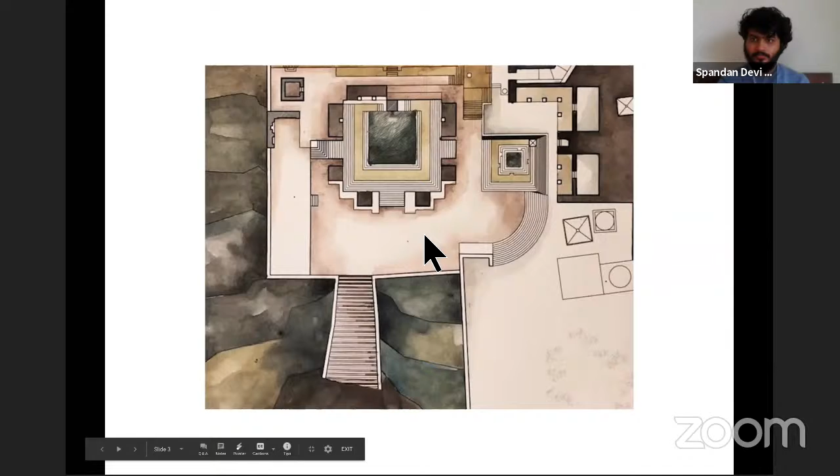Good evening. In a socially distanced world, Design United is an optimistic digital platform for collaborative design and connection.

Design United was created in March 2020 during a period of intense lockdown and quarantine measures within the region. The aim behind Design United was to create an optimistic space for regional dialogue, connections, collaborations, and opportunities for young regional designers and design practices, a much needed network of support and peer mentorship during these uncertain times.

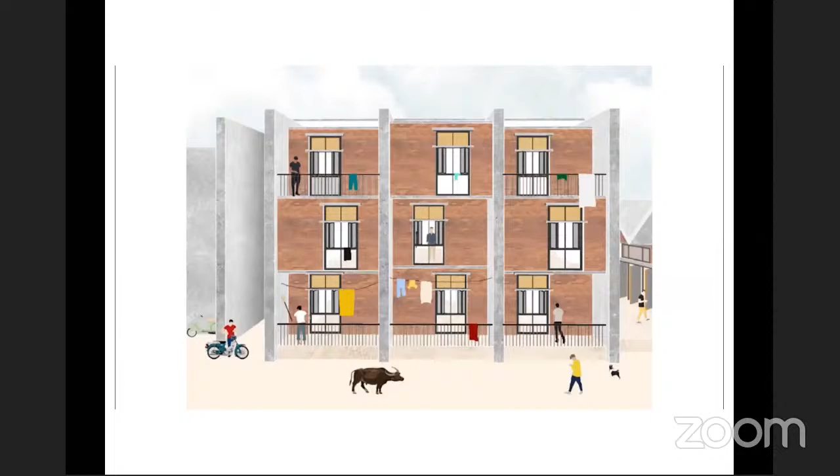Talented young designers and design studios working on design innovation with an approach that is relevant to our South Asian region have been invited to be a part of the platform. We also encourage design students from the region to share their work, be involved in the dialogue, and to be an active part of Design United.

Design United, most of all, believes in creating a community of designers and design knowledge that is largely contextual, with focus on contributing to the environment and our community. Design United believes greatly in a spirit of collaboration and idea exchange.

Welcome to Design United's 30th Design Conversation and our 7th mentorship module. Mentorship and constructive criticism is essential to nourishing designers.

Today, we will be in conversation with two renowned architects, Yanto Effendi from MODERNSPACE Indonesia and architect Ajit Andagere from AA India. I'm Varna Shashidhar, founder principal of a regional landscape practice, VSLA, based in Bengaluru.

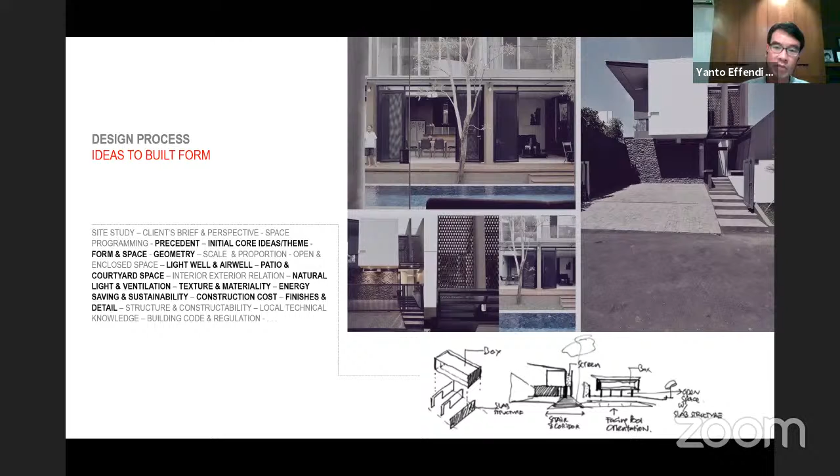Initial core ideas. On the first trial, the first time we get the appointment, we try to study the site, study what's the core problem of the site that we can resolve, and resolve it into a design language.

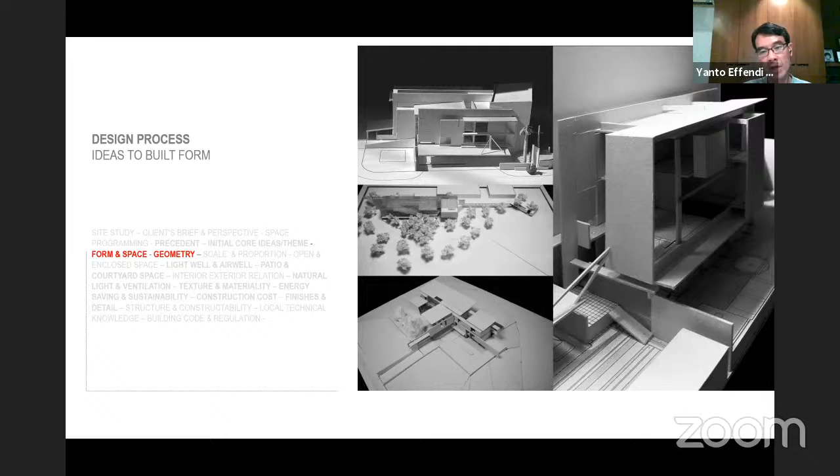We study the form and geometry. This is the process in our office, that sometimes we do models just to study the forms. And then we do 3D studies also, from wireframe studies into basic renderings, just to see how the materials, colors, and schemes work out together.

Each of our designs, basically, I would love to have natural light and natural ventilation coming into all the sites. So every site, every specific site that we receive, either small or big, we always try to analyze the potential of the sun, natural sunlight, natural air to come into our buildings.

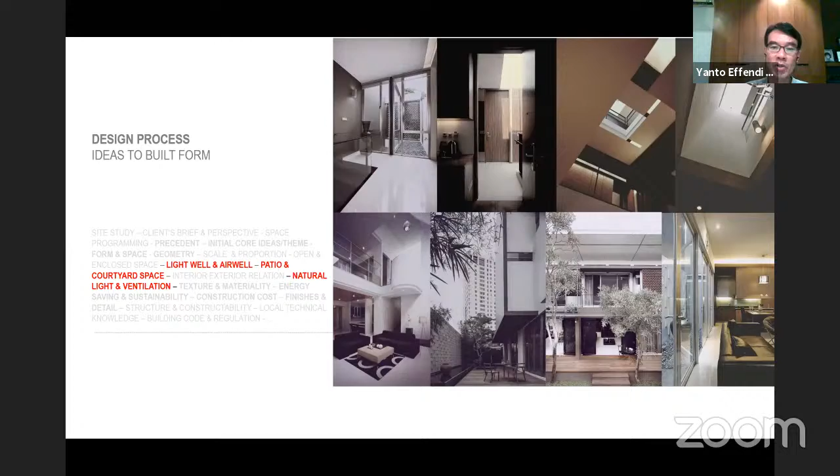When we try to do this, we know that the effect is heat. So during this period of time, we extensively try to study how, inside our space, to make it quite thermally comfortable in order to get the most optimum light into the space, but we can also reduce the heat to prevent it, to make the thermal comfort inside our space.

The materiality we choose depends on the mood, depends on the program, depends on the specific mood that we want to create in the space. The material and the details itself we create to solve each of the finishes that we have to collect into the space itself.

After the form and everything, the space is created. We also try to solve every detail of the particular corner, particular joints, so that we have well thought out, precise details to solve every corner of the materials that we use, so that everything works out well together by joining all the materials to create the space.

This is some material that we're using. We're using textures, smooth textures, rough textures, and then some of the character of the material itself to create the specific functions.

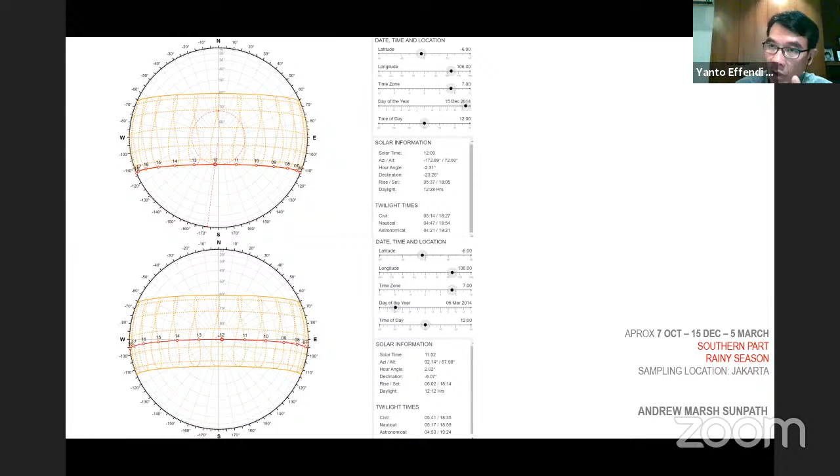That's all the introduction of our brief projects. I wanted to present 3 projects which I felt were milestones for us, to study specific use of material and specific ways of solving problems. Like in this house particularly.

This project happened around 2012. We have this kind of project that has one area facing west sun. During that west sun period, from 12 o'clock until 4 o'clock, there will be heat transferring into the space. So this particular house is actually the one where we first tried to study how we can protect the glass that we want to open for view, so that the glass doesn't get heat from the sun. When it's not heated, hopefully the space inside will be cooler due to the protective materials.

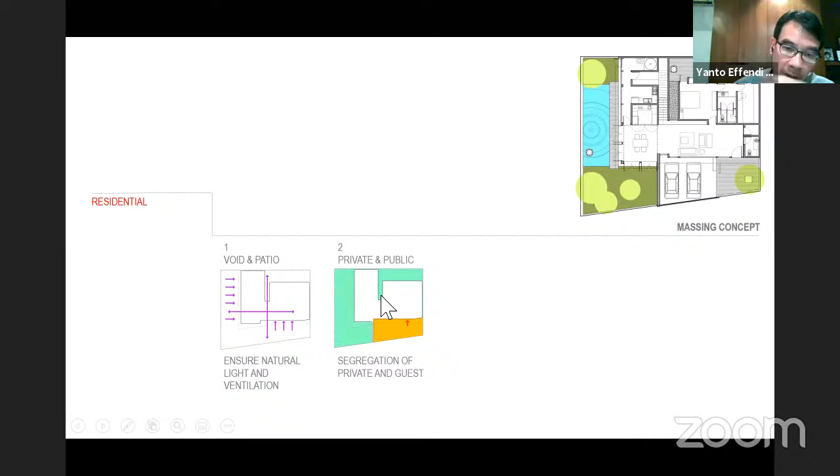We've done some analysis for this house. Normally for the massing, we like to break it into smaller parts so that hopefully these smaller parts can contribute when we open two sides, allowing air to flow okay. The character of the wind also depends on the openings, big and small, which affects the wind to create a wind tunnel and breeze inside the house. So for this big massing, we cut the area so it will be shorter, hopefully allowing the breeze to come in.

We divide the private and public areas diagrammatically, trying to segregate them. These are the schematics we used to study the wind. This area is the west-facing side, so we try to treat it so it can protect more of the spaces behind it from the heat.

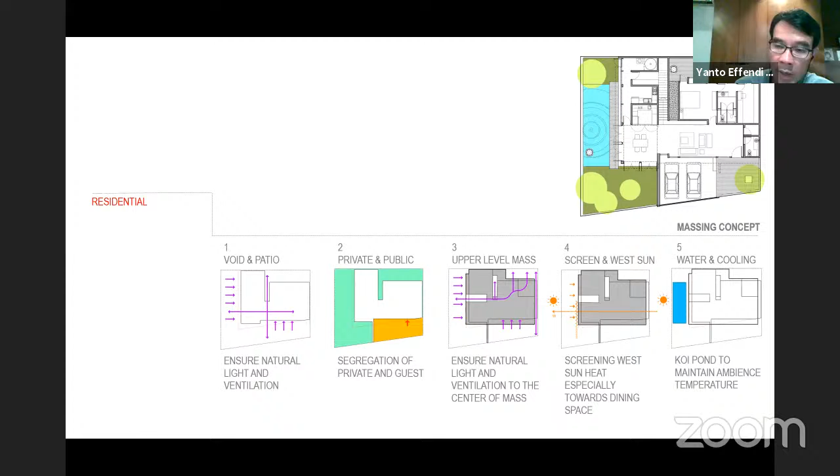So we do some sunscreens here, and since the owner has a hobby of keeping a koi fish pond, we put it on the west side also, just to allow the air to evaporate from the pool itself to cool, like a passive cooling for the space. When the breeze comes in, it can blow in the evaporated water vapor. So in this particular house we tried to study the screen.

Firstly, in our earlier design, we tried to use a screen made of timber. But when we went forward with the project, we felt the heaviness of the outdoor timber and the thickness required meant it wasn't bendable and was quite heavy. So we tried to find another alternative.

At one time I was looking at a pool chair using synthetic rattan weaving. When you try to sit on that during the day, you won't feel hot on the chair. So I was thinking maybe this kind of isolator material could be used to screen the heat, so it's not transferring into the first layer.

So what we do is install the screen here, and we tilted it so the angle can block the hot sun until it reaches an angle where we allow rays into the house, but these rays are no longer very hot. We were helped by a local weaving specialist with this material. We felt this material is an isolator, so it doesn't keep the heat inside, and when the sun hits it, hopefully it doesn't transfer or transmit heat into the materials, doesn't conduct heat through the walls, and doesn't reach the glass.

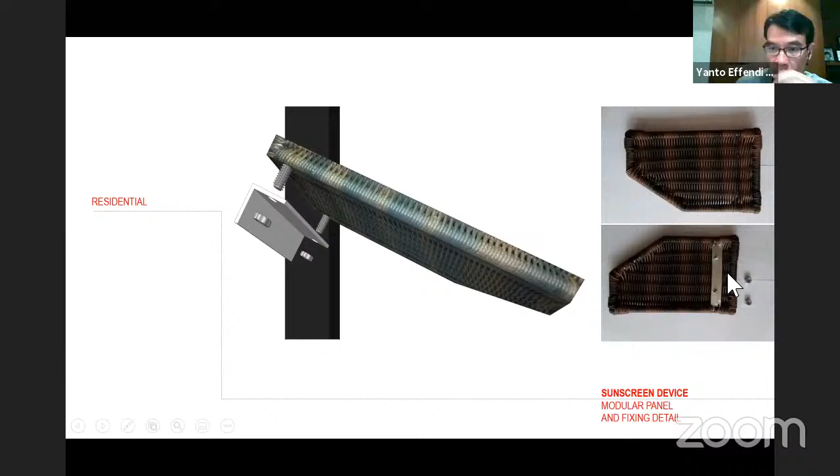This one is the mock-up. We drew the mock-ups, and then with help from the specialist we made the mock-ups and installed them as screens. So we can create any form with this kind of screen.

So when the building is done, this is actually the space where the dining area is located. Below here is the koi pond. So the passive cooling is working over this part of the area. This is the west sun. This is the part where the entry area is.

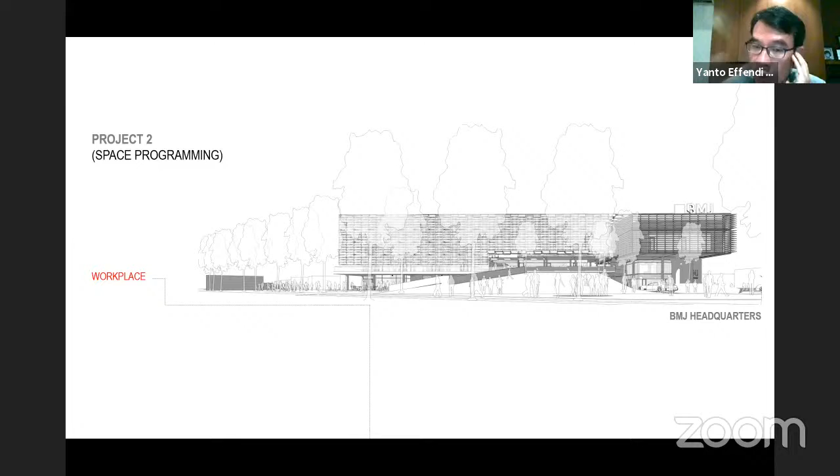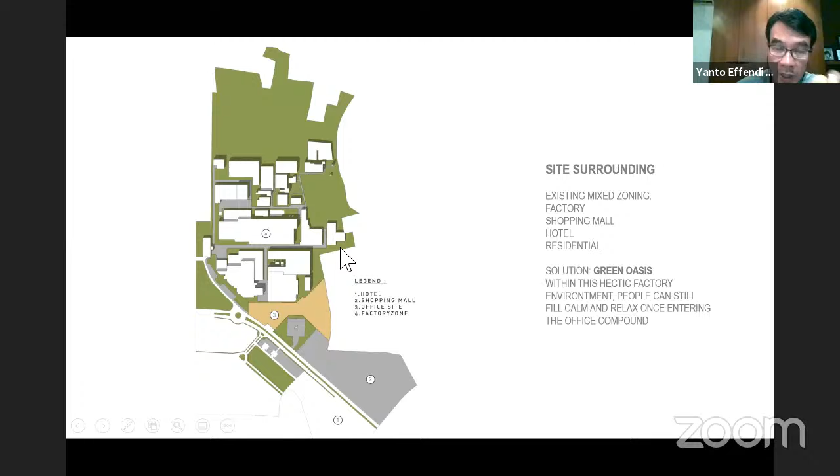So we have the lot at this yellow area here. This lot is an irregular plot. There's a helipad here. Here's a shopping mall here. There's a hotel here, and all these parts are the factory areas. So this is actually the factory headquarter office that produces cigarette papers.

So here's the site, about 2.4 hectares. We try to divide the site into two areas. Here we allocate the space for the public car parks and motorbike parks. So here's the location, because in this irregular part we try to fit in the requirements of the parking facility.

And in this area, we try to put the main program, the office. The main office building is here. This is the reception building. So the flow will be from this gate. We have to go all the way here until the reception area, check in, and then they can be distributed to the office and to the factory area.

So we would like to do a resort type of office where it is protected by a lot of green areas and a lot of trees, because over here we felt that it's too dry and there are not as many trees. So we would like to name it a green oasis for this particular project. So we would be thinking to plant a lot of big trees and protect the site also. Hopefully by the shade of the trees, the ground area will be protected from the heat, and then the heat itself doesn't transfer and create a hotter microclimate around this area.

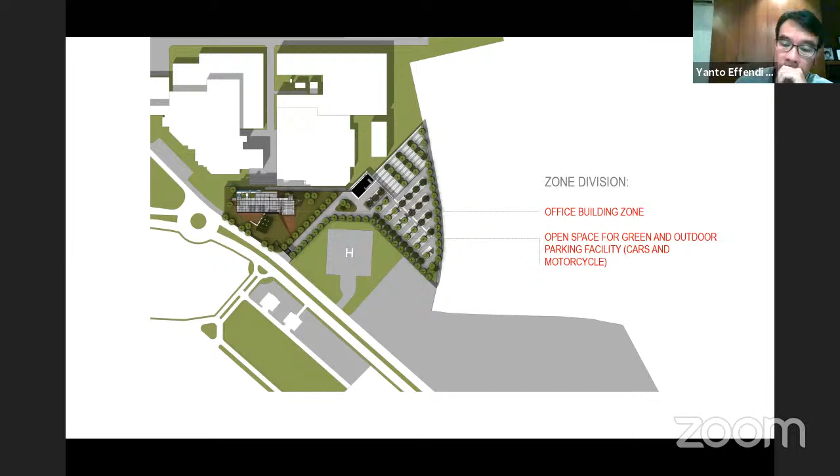So this is the perspective aerial view. Actually, there's more concept on the programming, but maybe I didn't have time to really elaborate this functional area. But what I'm trying to elaborate here is how we first studied the way to protect and surround the heat, to protect the buildings and to create passive cooling and thermal comfort for these buildings.

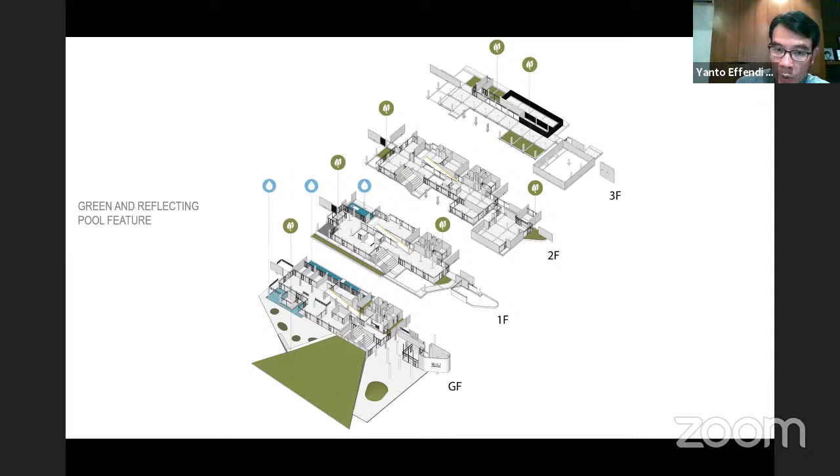So this is actually a diagrammatic function for all the interiors, so that all the floors can enjoy all the green areas. We will insert greens and water into each of the slabs. This is the diagram. And it also pertains to the programs.

They wanted to have intense collaborations now. Each of the departments should meet each other in every place they can, start to have a dialogue and have a conversation, so the creative moment will hopefully happen after we open up the office. They can blend with each other, bump into each other in the staircase area, in the public area. Then they can sit at the provided space, either interior or exterior. They can talk, and hopefully they will generate some new ideas and a collaborative way of thinking.

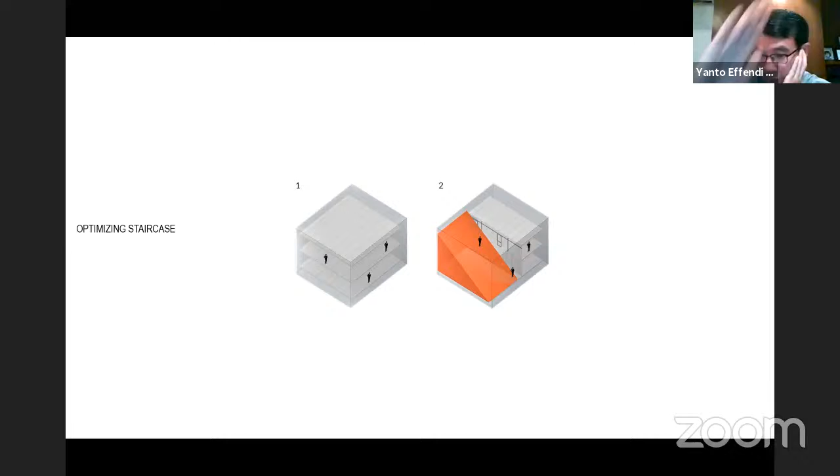So the orange part here, we try to create quite a big staircase area to connect all these floors. And this staircase area, we can utilize for functions. First, we can utilize it for functions like an amphitheater. Below here, we can use it for the meeting area. The lower part, we can combine with the space over here to create what we call an infill area that can function multi-purposely. Here is a brief to elaborate this area.

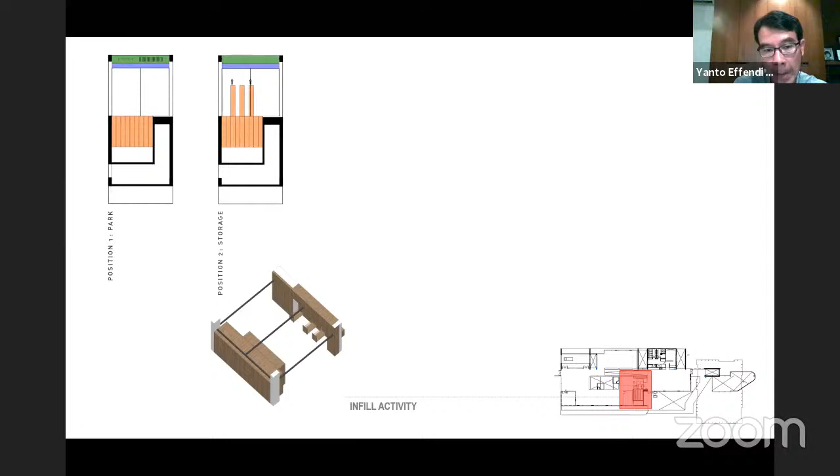So below these stairs, it's like a section of these stairs, and we try to create this diagram where we can have storage, and when we drag and pull it, we can have a storage area, and then an additional working space when they want a moment to read books, like a small library and working space. We can drag this cabinet out and have another zone of space here.

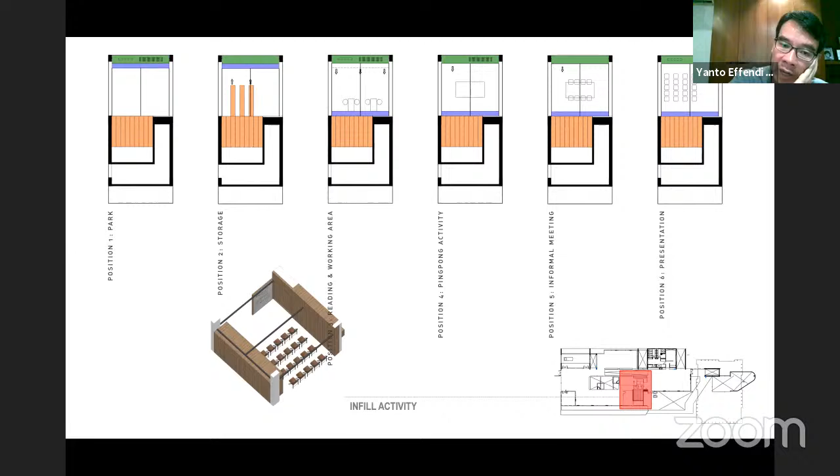And then they can do sports also. We have a ping pong table that can also act as a meeting area. And furthermore, we have storage to keep these chairs. When they want to have briefings or small seminars, they can use this space also. So it acts as a multi-purpose space. So this is the way we move the furniture later.

And furthermore, this staircase also acts as a patio or a buffer space for heat. So the concept is the main building is protected by this space gap that can protect the main building from the heat. So this one is an outdoor area, this one will be an indoor area.

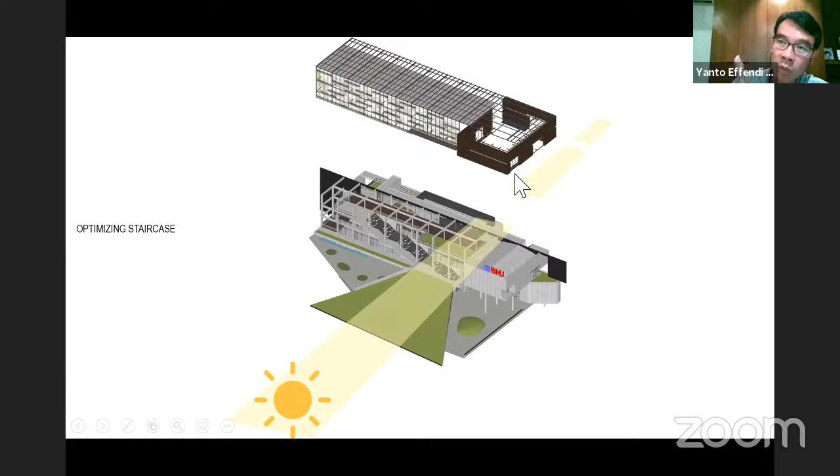So at this particular staircase, we try to protect this area also with the screen, but for these screens, we're trying to explore. We try to do some screens with green planters. So hopefully when the plants climb up the screen, it can screen all the staircase behind. So hopefully the air quality improves, and during the morning they can spread out more oxygen. Then the breeze also can be quite refreshing for the staircase zone there.

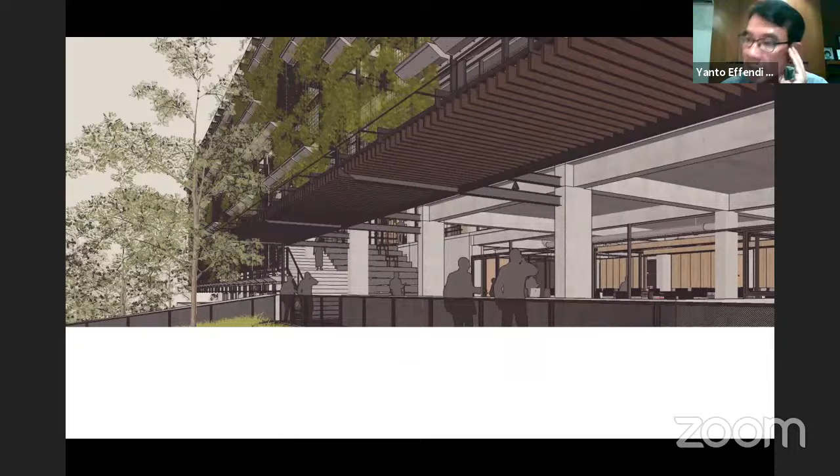So this is the study of the 3Ds. So hopefully when these screens are full of plants, these plants can act as screens, and furthermore can act as a view from the office. Every window can see the greens from all over the working space. So this one is the concept of the screens.

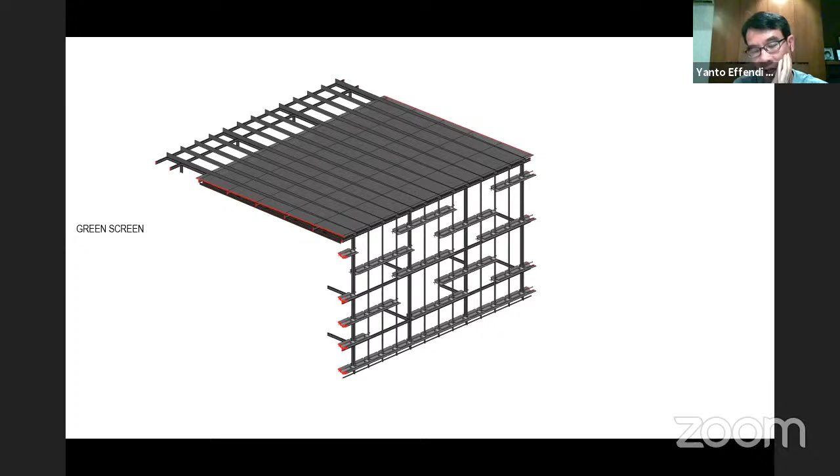We custom designed the details of the pots. This is too small. So we try to custom the pots with custom fiber cast with the whole watering system and everything, and we randomly place them into the structural skin, and then we put a wire mesh and then the plants, and hopefully the plants will someday cover up all the screens here.

And when it's covered up with the full green area, the room temperature behind the green space hopefully can reduce, creating a comfortable microclimate behind the staircase area there.

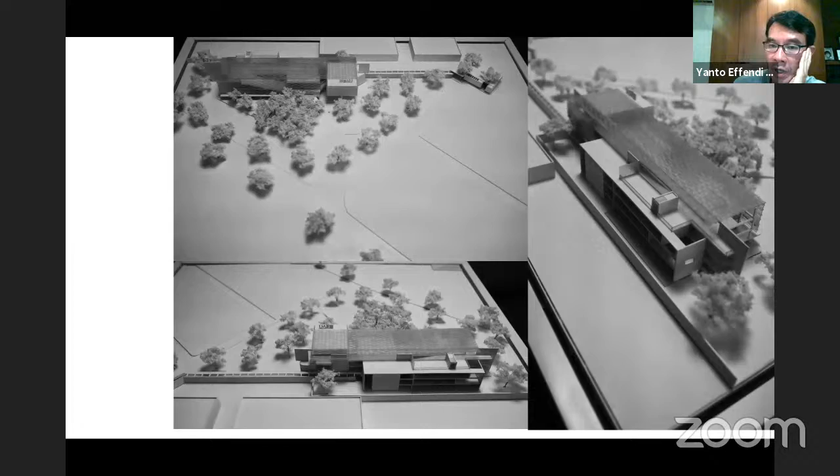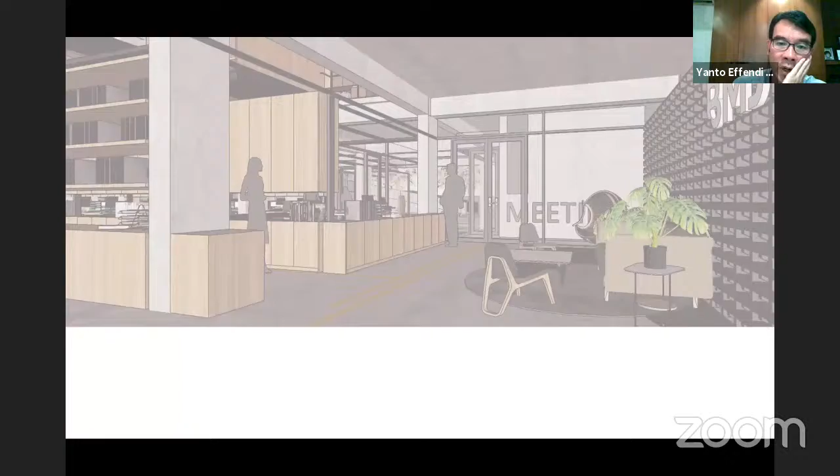This one is the early model study actually for the headquarters. There's some study of the space interior. So what we try to do here is, every corner of the space, each of the stations, the place of working, can see the water, can see the greens. So it's like a biophilic feeling of space.

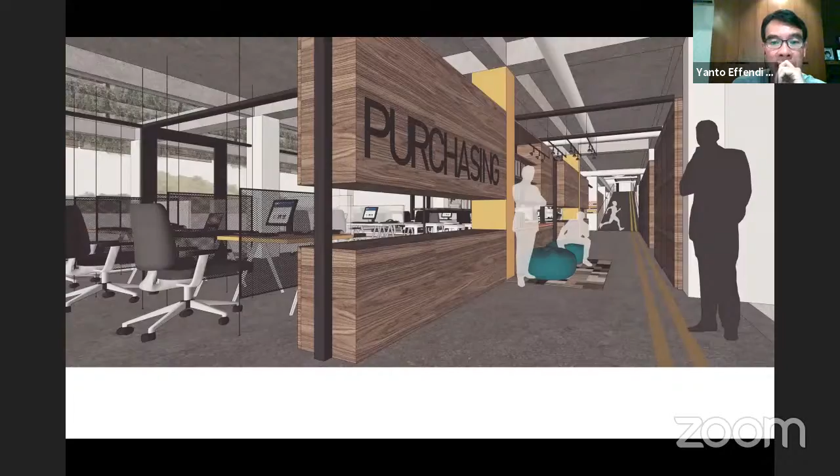So this one is one corner that can face the staircase area where later on, when this green area of the screen has filled up the screen, they can enjoy the greenery also. This one is some of the interior space. So this one is actually the meeting area below the stairs that we try to use up and optimize all the space. And the lower part here is the area where previously we've done the multi-purpose combinations of space.

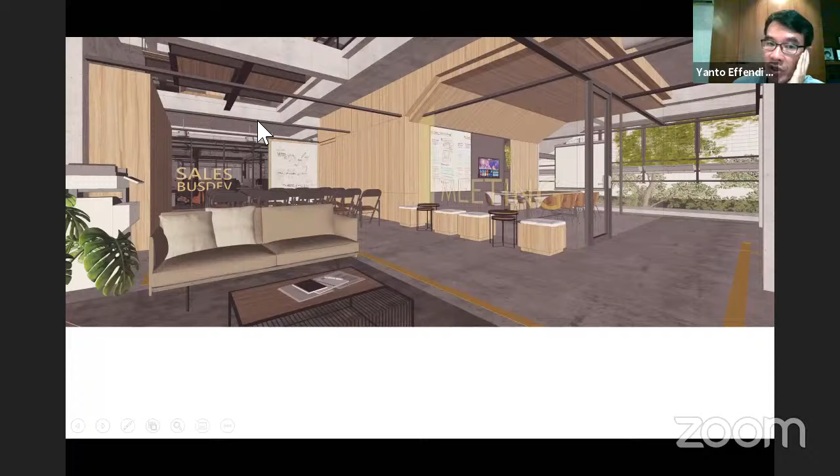So over here we create a space of melting pot, so that everybody when they pass, they see this kind of space, they can sit, they can bump into each other, and they can discuss something over this area of space that we have created, and they can see the greens also. This was the meeting rooms, below the big staircase.

The play within the voids, the double volumes, and because it is an open office, we try to provide also some of the spaces where they can have quiet moments. So we create these kinds of pods. So when there are needs for some people to work more private, more alone, they can use this space to work.

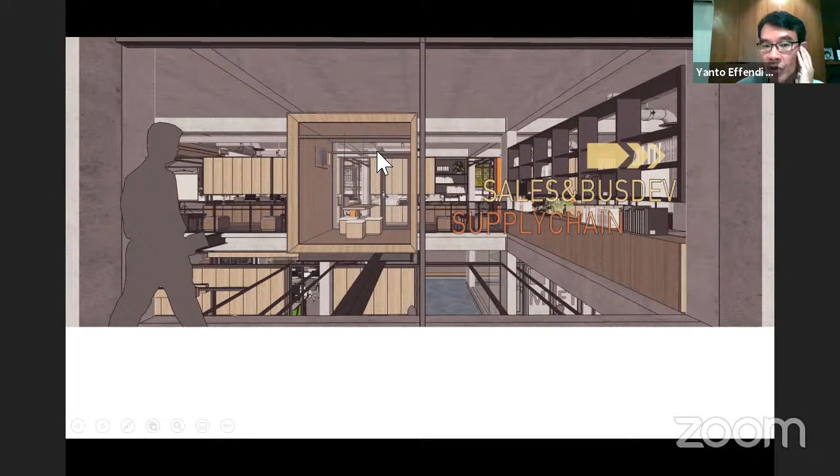And some of them we put on the voids, on a double-height area. Here they can act as a bridge. They can see what happens below, what happens at the staircase area, and they can see the green all around the sides. This is all the melting pots there. And besides the normal working desks that we provide, open office, they have these melting pot areas also where the coffee machine will be put here. They can do coffee, and then they can just have a small discussion here.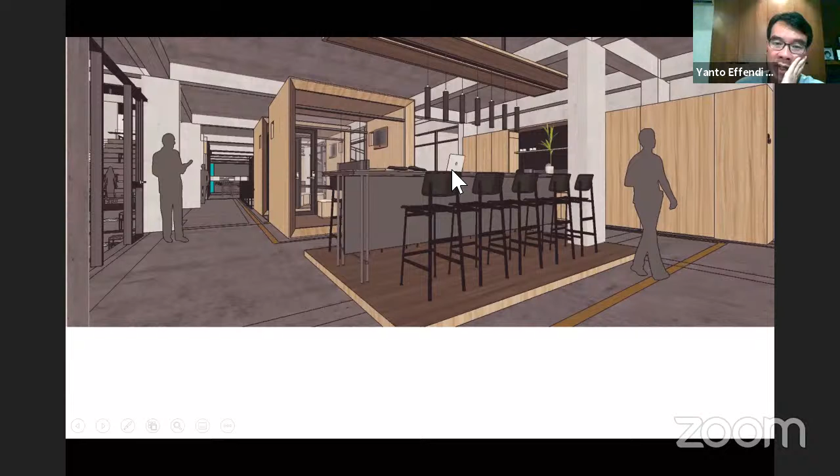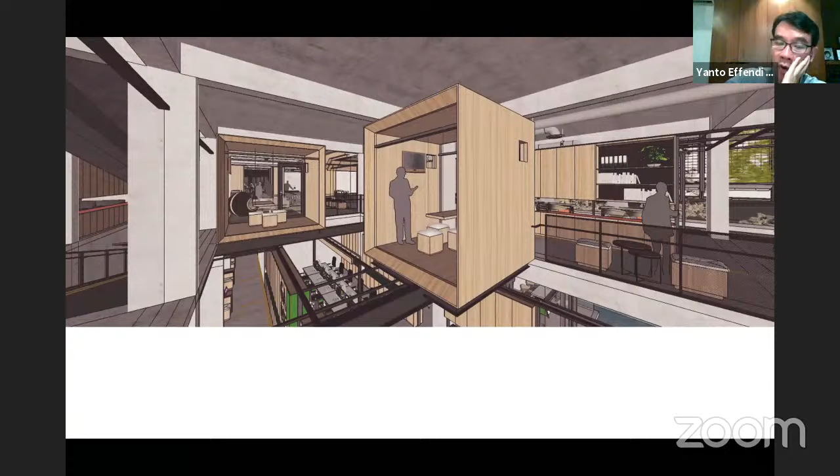These are the impressions of the interiors of the working space. Here we have ramps also that climb up to connect all the floors until the roof area. A big meeting area. So this is the impression that we wanted to have.

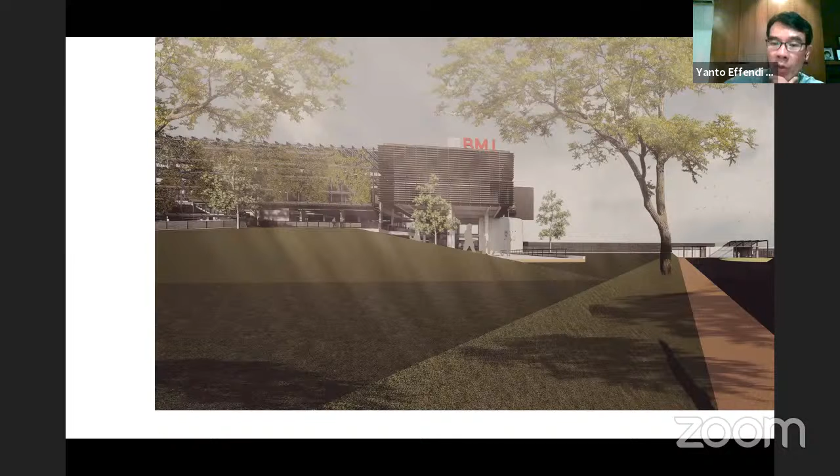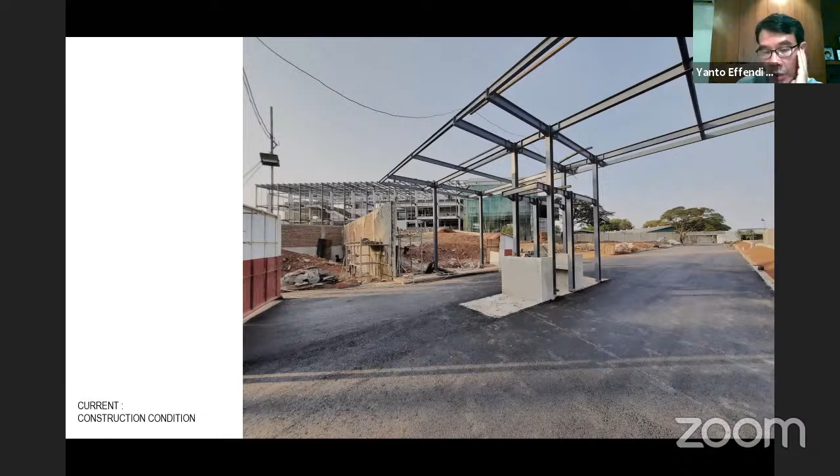So this is a photo from 2 weeks ago when we went to visit the site. Hopefully this December the building itself can be finished and we can continue to the interior parts, and hopefully next year we can already see the building done. These are some of the site photos that I took 2 weeks ago.

So this is the framework of the green screens that we're trying to create, and this is the staircase that connects each of the floor areas. This building is four stories. At the top here is the roof area with the greens and open roof deck areas.

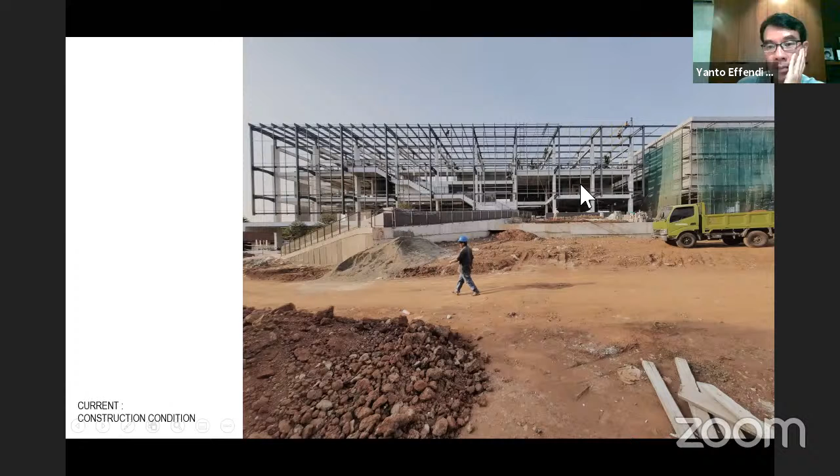This mezzanine here is actually a multi-purpose hall, and below is the gallery. They want the gallery to exhibit their old factory machinery. They would like to put it there and have a little gallery to welcome the guests that come to the office.

So these are the ramps that connect. We have circulations that connect all the surroundings of the buildings, and we can go fluidly through the buildings, go from outside, inside, and then go to the staircase.

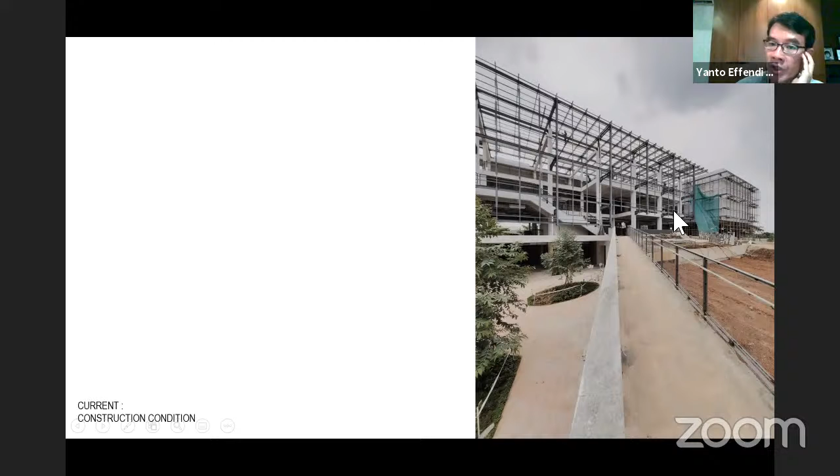So we grow the trees from small. Actually, it's from nurturing the trees from small. Now it's quite high already. It's been planted around 6 months. Hopefully there's another 6 months that it can grow taller. We're using the eucalyptus trees here.

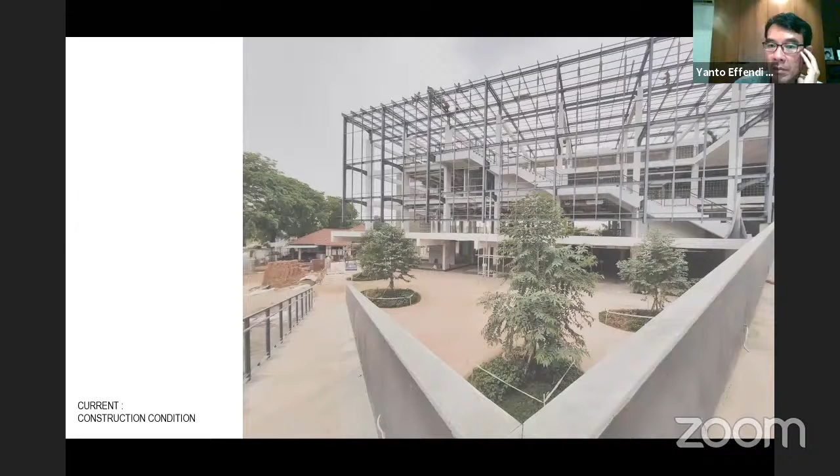This is the main structure where later, on these steels, we try to put a fiber pot just to grow the trees, and the part below here is also a green area later for the roof garden. All the roof gardens are meant to protect the concrete itself from the heat, so that hopefully by all these means the room temperature behind this space that we've created can create a better cooling system and a cool microclimate inside this area.

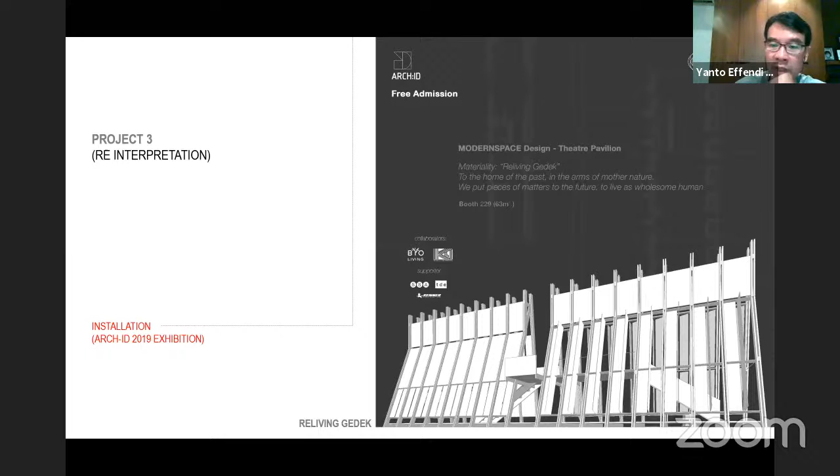Okay, the third project we would like to show. Just early this year, we were invited to collaborate with the material suppliers to create an installation. It just happened this January. Right after this January exhibition, which we held for 3 days, we were all shut down by COVID. So luckily, this had a chance to be exhibited already.

For this installation, because we are eager to study the way buildings can operate within this tropical environment that we have, it's wiser for us to study from the old adaptive vernacular buildings: how they were constructed, how these kinds of houses could stand up to the weather, the humidity, the sun, the heat, and the ventilation. So all these things we try to extract.

Basically, it's a simple house. They built the house with timber construction. They used the local timbers from the nearby area, because in that old time they didn't have enough transportation. So what they could use is just the material from the nearest environment: coconut wood, teak wood, or sometimes bamboo. This kind of material is the main structure of their buildings.

And for the wall itself, they create weavings of sliced bamboo, so they can create perforated walls. This kind of wall interested me to create this installation. So this is just the rough sketch where we study from the original and try to distill the form from there.

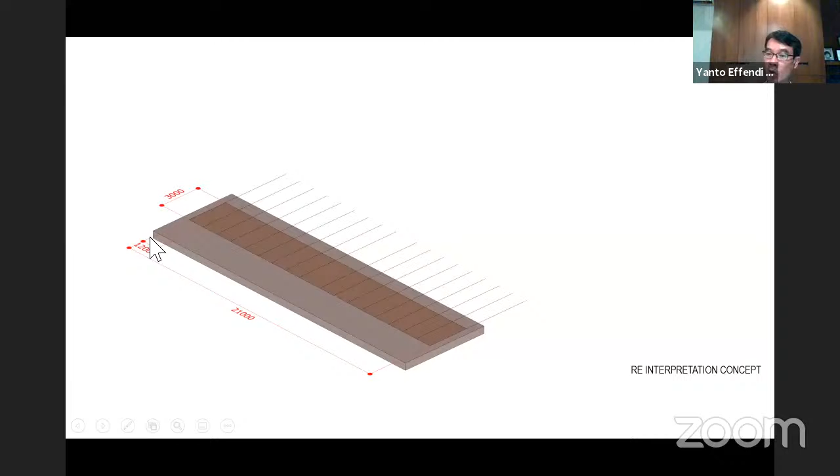The module itself we get from the module of the plywood, 1.2 by 2.4. We cut the modules so that there is minimum waste, because the size of the plank itself is another grid of the 1.2 meters. Here's the stacking of the modularity for the slabs and the structural connections, and this imitates the structure of the old vernacular house.

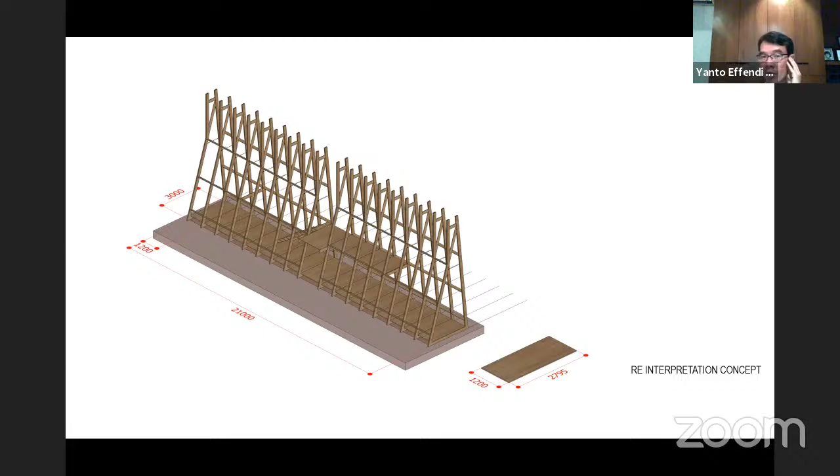In the old house, they used solid timber from coconut, teak or bamboo. Here we use recycled plywood. It can be renewed, and then we cut it into planks. These planks act as rigid triangular structures. We covered some parts with another plywood acting as a wall, and we also studied the paneling.

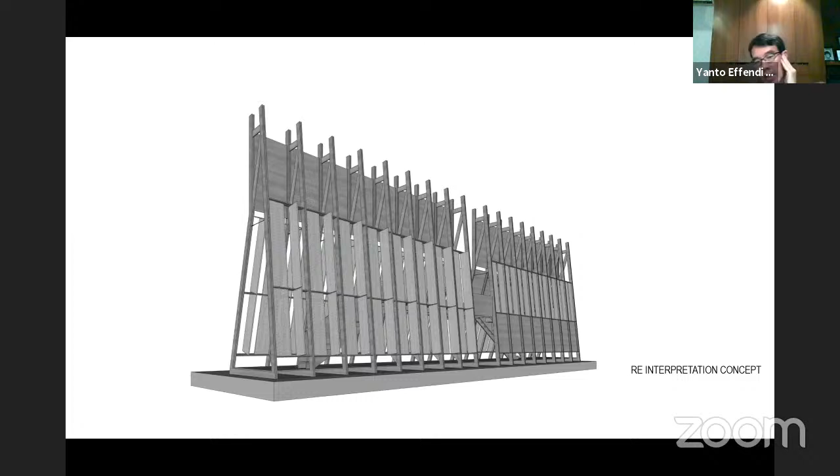We tried to study a simple weaving from the bamboo. The old weaving is called gedek. So we try to restudy the gedek weaving into a new interpretation. This is the model that we came up with. We created a circulation area that people can pass through, and then there is another double-story floor, so that people can climb up to the second floor and then go down again here.

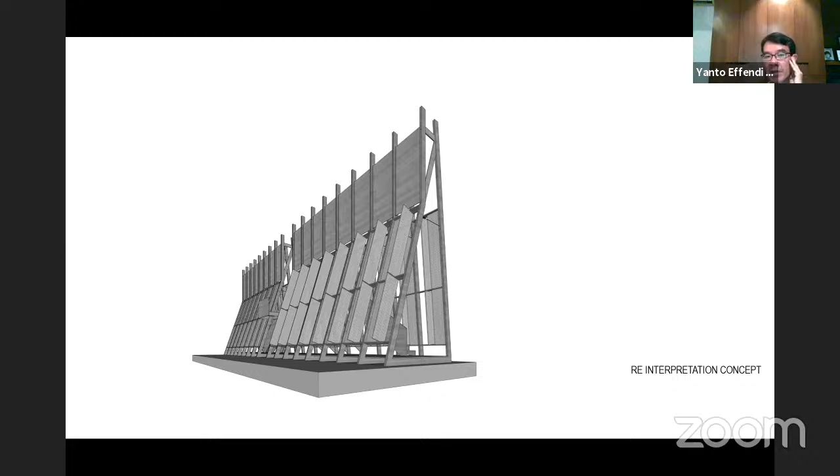And this descending staircase can also act as an amphitheater for watching the process of how this building is created. The old house was built with bamboo; we try to modify it. We collaborated with the local weaving specialists to create these panels.

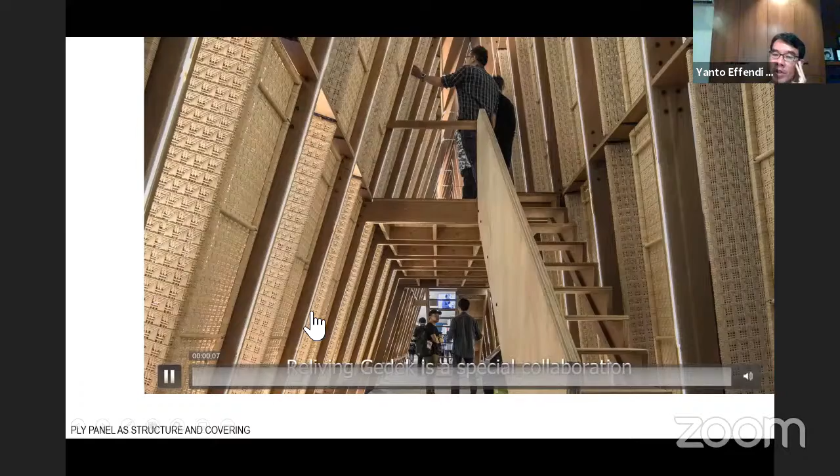Okay, we have a video here to show. This is how we collaborated with the timber specialists and the weaving specialists to create this installation. We're using plywood as the structure.

Here we're using not synthetic, but real rattan for the screens. It's prefab. It's created in a factory, then we install it very fast on site.

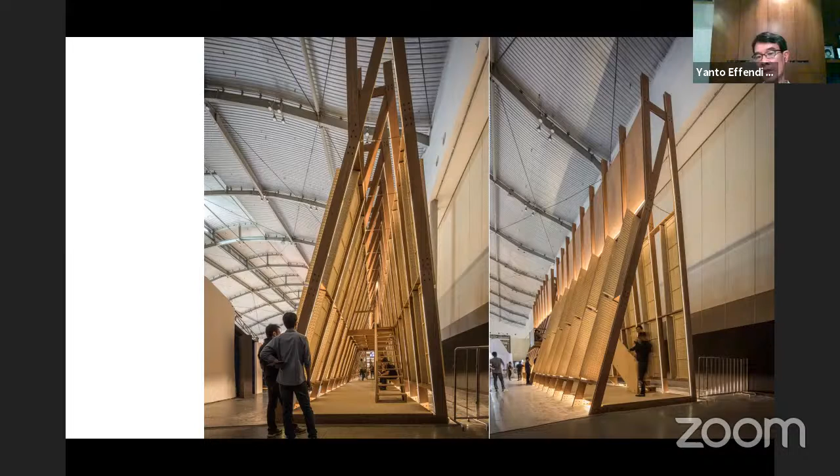This is our exercise, just to add another knowledge of ours as another way of constructing buildings based on the vernacular studies. So this is the result of the exhibition. We collaborated also with lighting designers to light up the space of these installations. This is the space inside and outside.

It's too bad that we didn't try this installation outdoors, because I would really love to see this installation in an outdoor area where the sun casts into the space and how the shadows are created. These are the details, and it was installed here for 3 days only. The exhibition was only for 3 days. Too bad, we cannot enjoy this space longer.

These are all the details, connections. We discussed also with the engineer specialist at the timber suppliers, so that we could discuss the joints and everything, how many bolts should be used, and how to strengthen and fix the structures of the triangle.

So the floors we also raised. Actually, this kind of method is what we extracted from the wisdom of the vernacular house. They raise the floors to throw all the humidity below, so that the floor is detached from the ground and will not be as humid as when it sits directly on the ground. Because in Jakarta, or in Indonesia, some areas are quite humid. This is the space inside.

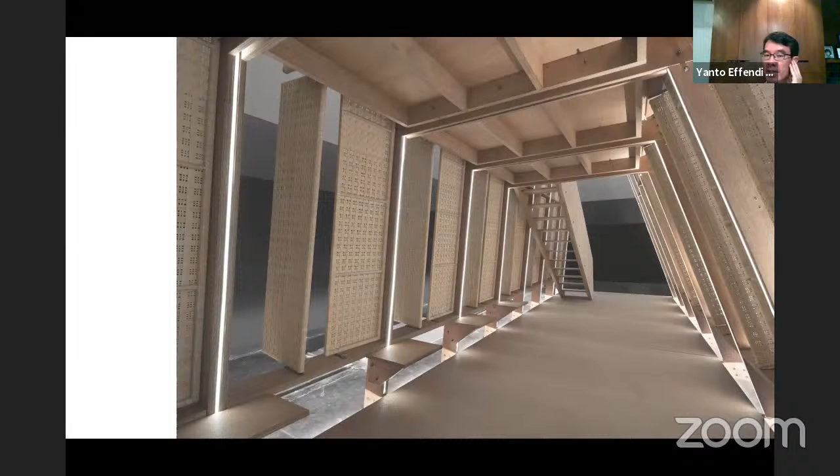Okay, I think that's my 3 project presentations. Hopefully it didn't take too much time.

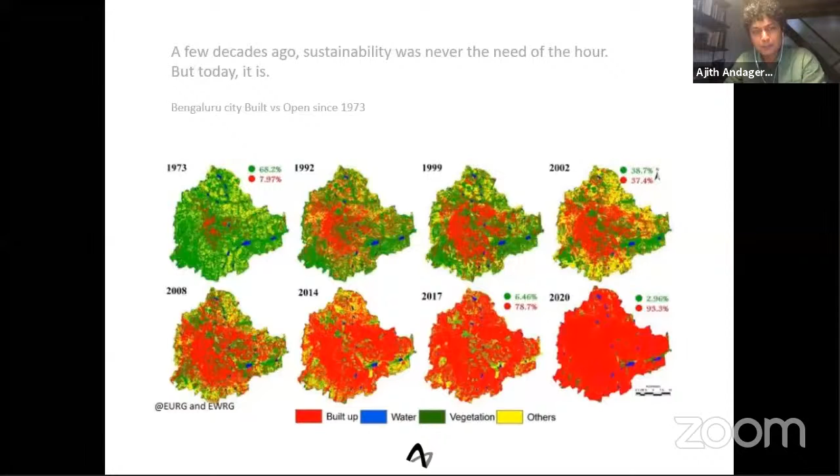So I always ask myself, how do we as architects play an important role, not just looking at the design, the elevation, or what technique I use, but beyond. So that's the journey. Through a small practice, we're trying to ask this question and find a solution through the kind of projects we handle. So how would we prepare to face this crisis? We will see whether we have a solution, or at least the mindset we follow in our practice.

So here, I'm going to briefly talk about sustainability. What is the meaning of sustainability? Not just in architecture, even in our life, how we can minimize the impact on Mother Earth, or on the planet.

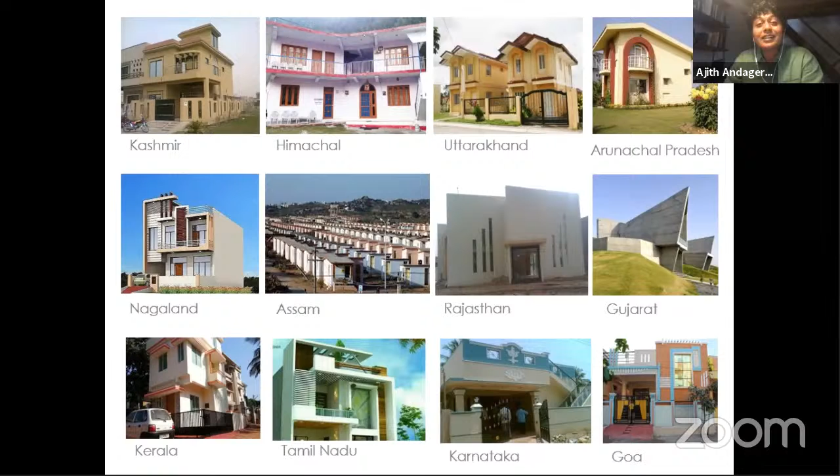So in a country like India, wherever you travel, the modern India pretty much looks the same. It's like a McDonald's culture, where a burger in Paris or Delhi or Jakarta tastes the same. Same way the architecture started looking pretty similar throughout the country, irrespective of the context, the topography, and the skill set. So everything is getting standardized.

So coming to our story, it's through our practice and our team, how we are addressing this issue on a project basis or on a daily basis. We believe for an architect, it's not just what we produce or our expression that's important. The way we live, what environment we create around us, that also plays a very important role in our practice and in our life. So that's the journey so far.

Our approach to our life and the architecture is kind of related to each other, with simplicity and minimalism. We believe in less is more. So whatever is really necessary, we kind of take it up.

That reflects on our projects as well, where we try to minimize the number of materials which go into our building. Of course it's not easy in today's world to get so minimal, because you get tempted all around on a daily basis. But we are trying our best to minimize the usage of material and spaces.

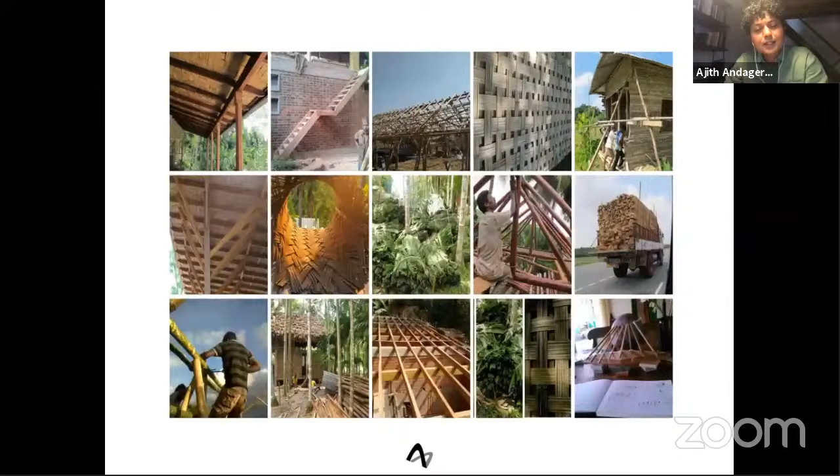I'm going to show a lot of photographs in this half an hour. We also build models, like the old school method. Each project will have a study model while designing the project. Then once the design gets frozen, we build a wooden model, a pretty detailed one, and keep it on site - though sometimes we're not able to keep it. So the team gets to see how the building looks like, because in today's practice many masons or carpenters may not have an entire picture of the building - they're just given a particular task to do. But here they also feel proud. We wanted to engage them into the whole process of the building, so at least they feel proud about what they're building, even if their involvement is just a month or two in the project.

We're getting into a few projects. The first project is called Swarga, which in Kannada means heaven - the client named that house as a heaven. It's a farmhouse for a client who grew up in Bangalore and picked up a farm about 60 kilometers from Bangalore. He now lives there pretty much 5 days a week, and also has a granite quarry next door, so he works from home. This is the finished model, which we photographed at the site.

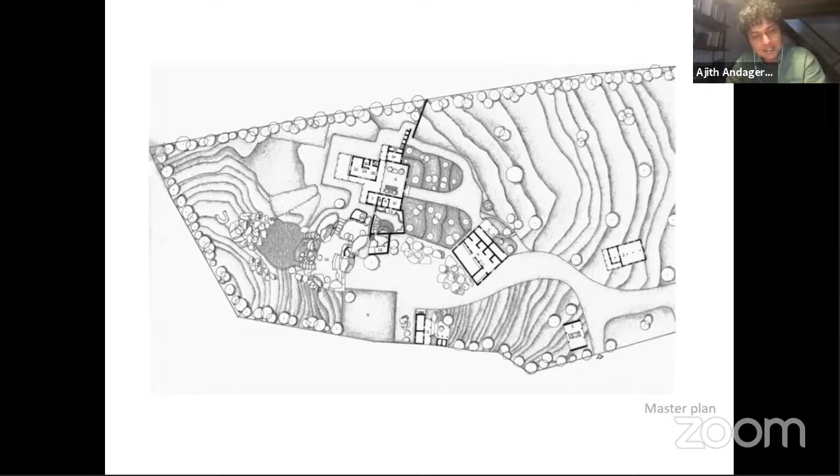The area is quite dry and arid, surrounded with a lot of boulders. In summer the temperature can go up to 35 to 45 degrees, so we spent a lot of time working on various options. Even our first option was to bury the entire house, because the nature around is so powerful we didn't want to go head on with it. But the client asked us not to bury the house because he couldn't really relate to the space - he'd never seen something like that. So we had to build above.

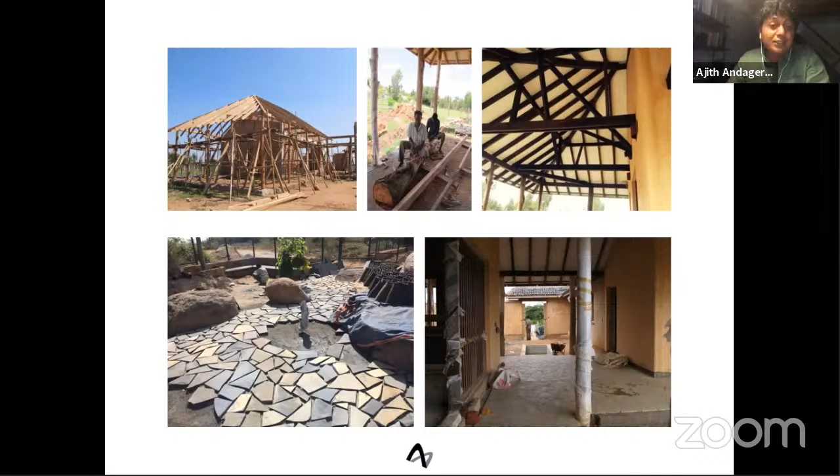You can see the building coming up. The farm had a lot of eucalyptus trees, which we removed entirely because it sucks a lot of water from the ground, and water is an issue in this area outside Bangalore.

This is the finished image of the courtyard. In North and South Karnataka, the common feature in vernacular houses is the courtyard. Sometimes you have a main door and feel like you're entering the house, but actually you're entering a courtyard first, so there's a transition of space before you really enter the house. We've taken that essence of village houses and tried to adopt it in our new projects.

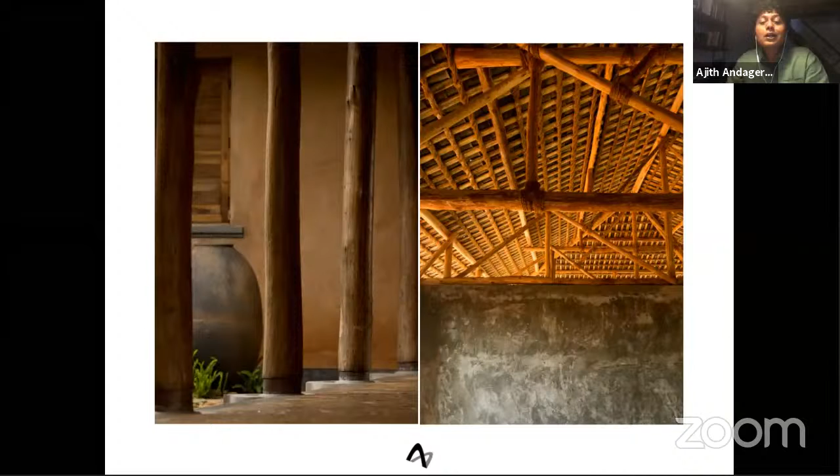This is a roof-building technique people have forgotten. Even villagers from the surrounding areas came and were really happy that somebody is building this kind of roof, and that this skill set is still alive. For us, it was an exercise to see if we could build a similar roof to our shape and size.

That's a patio where, what we observed in our traveling in the villages, south to central India, the life happens in a veranda because we are blessed with amazing weather. So in this house, it's a very small house in terms of the square footage, but the verandas and patios kind of make it bigger. So we created a shelter to enjoy the nature around. That's the kind of concept or the idea we worked on in this project.

So we created a kind of a story inside, so each space, even though it's small, kind of tickles you when you're in that house. You kind of feel like, wow, I've never realized this space is hidden inside. So things like that. And landscaping wise, we designed the edible garden. We trained the client how to maintain the edible garden around the house using permaculture principles.

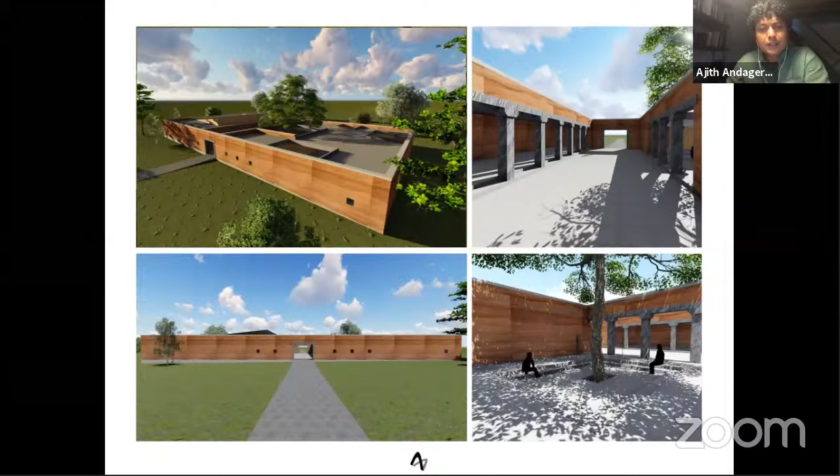So your skin, which is the envelope, should be as thick as possible. And your openings should be as minimal as possible, so you don't get in a lot of sunlight. The sunlight comes with the heat. Then how do you cool it? Next. So that's a 3D rendering. So we thought, let's build from what is available on the site, and try to keep it as minimal as possible.

So we came up with rammed earth technique walls, where you don't need a lot of masons to do this. You need one head mason, someone who knows how to do the formwork and the plumb line. The rest you need is a workforce with shoulder power. So we also wanted to showcase to the local villages that there's a different technique. It's not a local technique.

And the granite: Bangalore is granite country, so not very far from here was a granite quarry. And we wanted to see if we can use it, since it is a public building that can afford to use this material, which will last for 300, 400 years. Next.

So initially, the client, the government, didn't know what rammed earth is. So we had to do a lot of samples to understand, to come up with a costing, and to showcase how the wall will look. So even the local MLA and the other bureaucrats got convinced, and we decided to build.

The external envelope, the wall, is 1.5 foot thick, a load-bearing structure. Internally, we used a frame structure with concrete pillars, and the partition walls are made with sun-dried adobe. Next. That's the other shot. So you can see the formwork we developed after seeing many, many examples from around the world. We came up with a very simple technique, a solution which works for us.

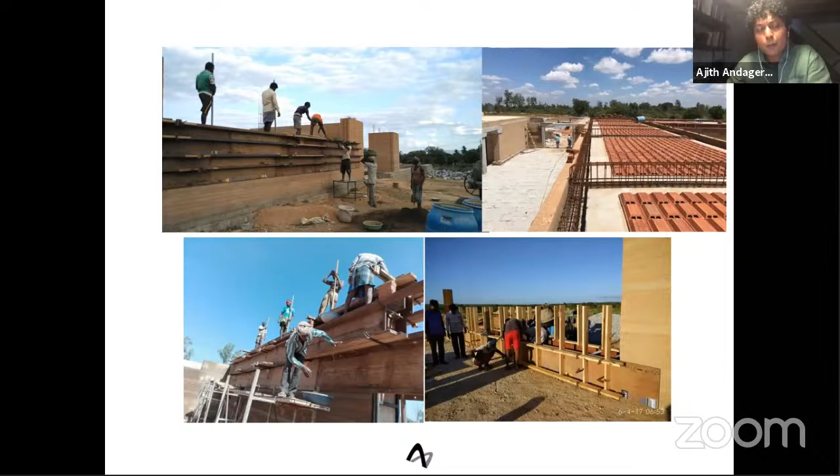Our original idea was to make it a green roof by growing aloe vera on top, because in future we wanted to harvest aloe vera for the lime plaster, things like that. And also aloe vera doesn't require a lot of water. It grows from the moisture it attracts.

Next. These are some of the images at the time of construction. Just to give you the size of the building, it's about 16,000 square feet, which has an auditorium and a few courtyards. Next.

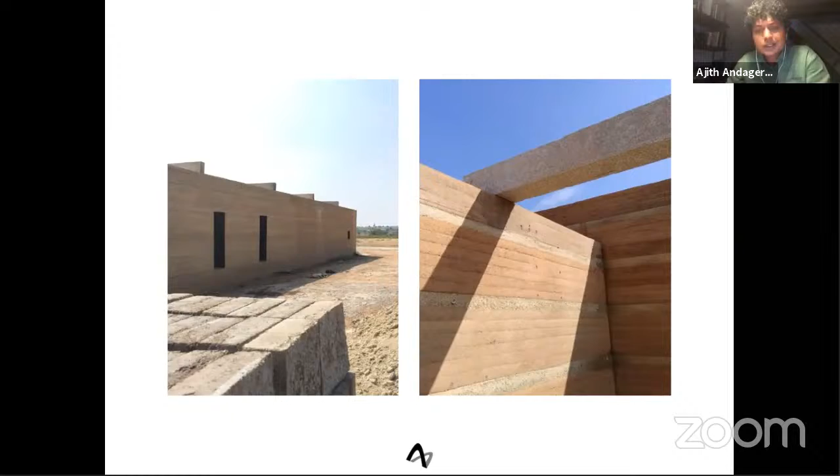Next. Yeah, these are some of the on-site pictures at the time of construction. This is the front facade where we carefully worked out to hide the window, or even a lintel, or even a roof beam, with seamless rammed earth, which doesn't require any paint or plaster. We even oiled the wall to avoid any kind of dust sticking to it.

Just when kids come and they touch the wall, we don't want any marks till it's set, because we added lime. It takes a little longer time to get harder. Next. I've visited a few buildings in Asia with rammed earth which are 600 years old, 5 stories tall, built without any of those modern binders, which is absolutely fine. So that inspired me to use this without any hesitation.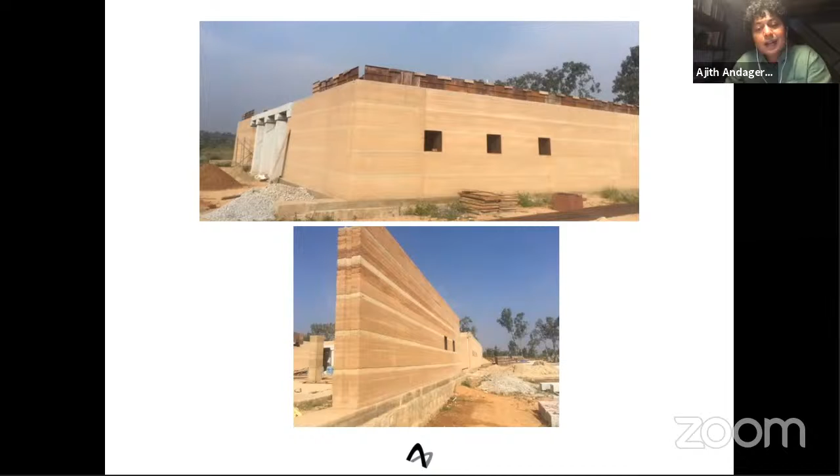And yeah, next. Going to the next project, which is a hospitality project in Andaman Island, in the far east of India, in the Bay of Bengal, where again locally there was no architectural history per se, because the people staying there are settlers in the last 50 or 60 years after independence, and the Andamanese tribes never used to build permanent structures. So there's nothing to hang on to for inspiration.

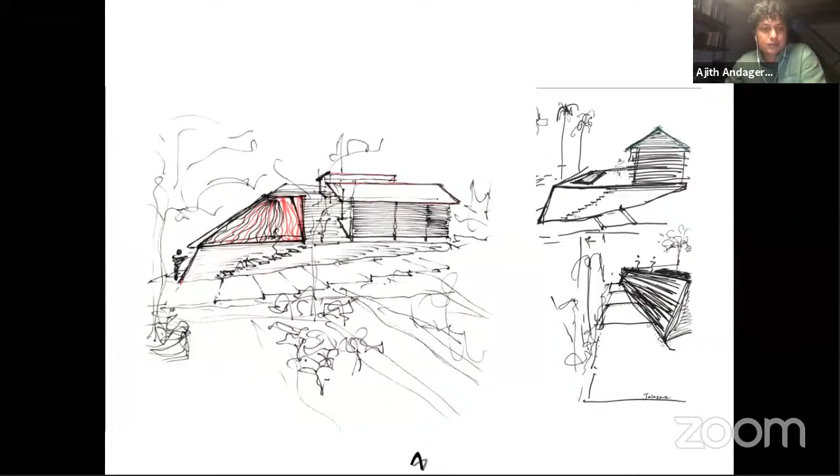So he did. Whatever trees we planted, because there's an issue on sloped land when you have clay soil, and it's a seismic zone, and in monsoon there are a lot of landslides. So we made sure we planted a lot of deep-rooted trees, which hold the soil, which also helps our building avoid landslides or damage. Next. That's some of the initial sketches on site. All this design happens on site, the initial idea at least.

I won't say the construction technique we used here is completely sustainable, because after testing the soil, it was not good to build with any earthen technique; we would have had to buy a lot of sand to stabilize it and add a lot of cement for the clay soil. So how do you strike the balance? We bought locally available cement blocks, and the structure had to be designed for a seismic zone. Next. But in return, we said, let's use the craftsmen and other materials like wood, bamboo and natural stone to create this space.

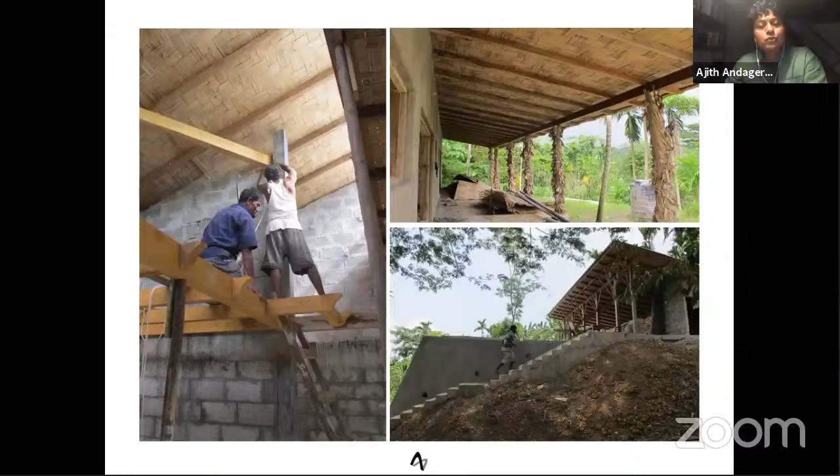Yeah, again in Andaman, in summer, even though it rains so much, there's a scarcity of water. So we worked out a method to collect almost 150,000 liters of water from the roof, and we use that as a backup in the summer. This is the local technique where people build up to a 1 meter high wall, then woven bamboo. This is the kitchen and the service space; the office and the laundry happen here in the courtyard.

And I didn't speak about it: we encourage a village of potters to make these pottery tiles. They're not machine made; the potters still make them, and the craft is really unfortunately declining. Earlier, before the introduction of the Mangalore tile, a lot of houses across the country were done with country tiles, made in different techniques, some on the wheel, some in the mold. So we are trying to revive that and use it in our projects. Next.

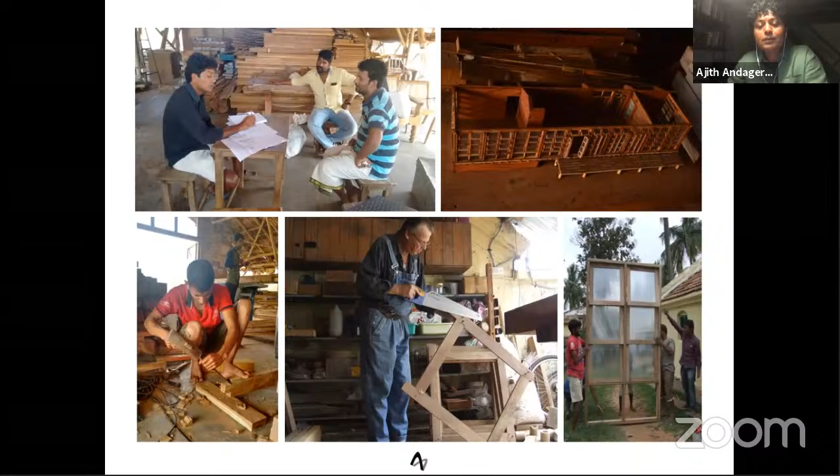You can see right bottom is the sample wall which we created. It's a multi-wall polycarbonate sheet instead of glass. We use the polycarbonate because there is a cavity, almost 4 layers of cavity, which improves the thermal comfort of the space. Next.

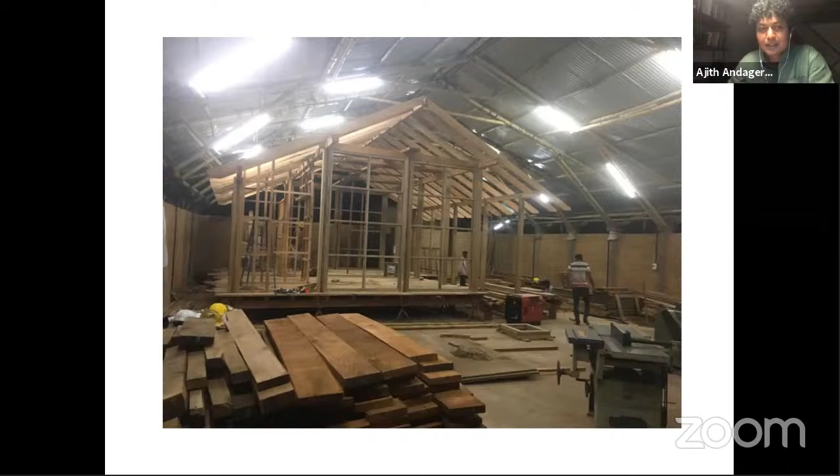This is our workshop where we built the entire structure. And there was a bit of a challenge I took in this project with my client. He's a lover of Bali and Indonesian architecture, and he had almost ordered a wooden house from Indonesia, when I came to know. I told him, why don't you give our carpenters an opportunity? Why do you have to go to Canada or Indonesia to buy wooden houses when we have our own carpenters? So he really encouraged us to do this.

So this is our first prefab project, which we've done in our workshop. That's the night shot. Next. Structurally, we worked the lighting with very minimal LED lighting, which gives indirect light. So it was a good exercise for us to work like this.

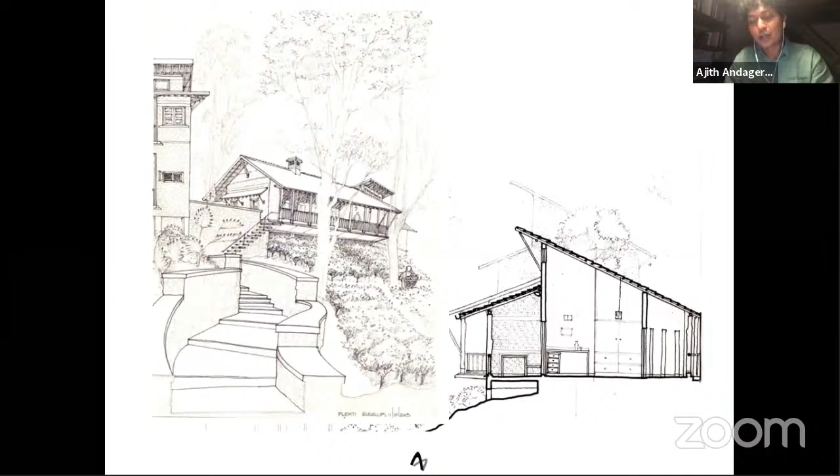We had to study how people used to build again: what is the kind of wall thickness, what kind of window openings towards the south, towards the north and the east. So next. That's some of the images of the site.

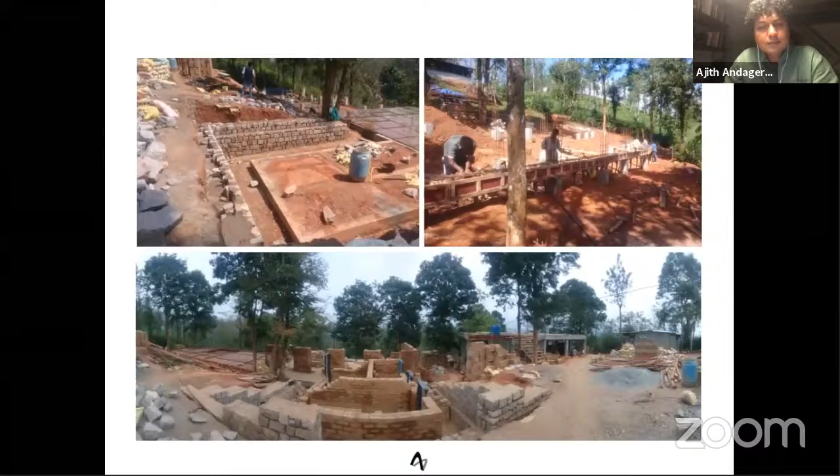Again, it's a load-bearing structure we've created. You can see we're cleaning the old Mangalore tiles, and bottom left is the recycled windows, and using bamboo for the railing. So it's always fun for us to involve all these craftsmen and look at what is available locally, instead of thinking what I can get from 500 kilometers, or I really like one material but it's available 1,000 kilometers away.

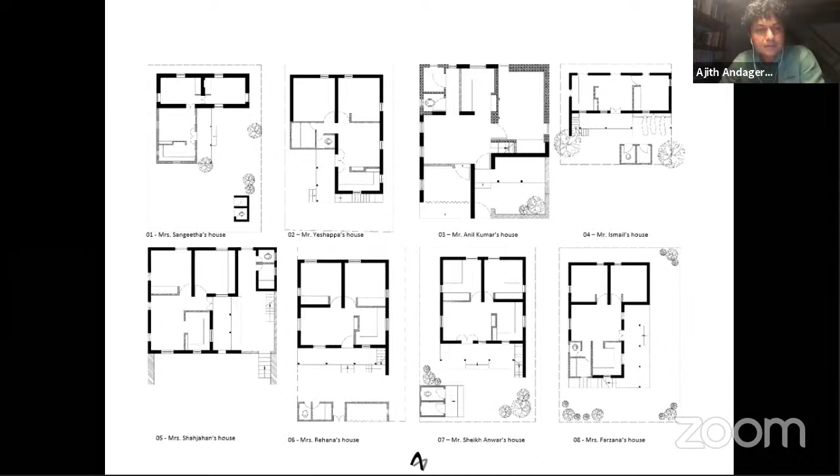Yeah, these are the beneficiaries which we dealt with in that village. And in our observation, some of the small spaces they built out of necessity, not any style or how it looks. They're so pretty and so minimalistic. So that's our research in our practice we do.

Next. This is again the previous project I said in Gudalur, Tamil Nadu, where after finishing that guest house, the tribal communities came to us and said, we're getting some funds from the government to build these rural houses, can you help us? So next, again, 12 houses.

We trained the entire cluster of people how to make adobe, how to treat bamboo. So we use bamboo because they're amazing at working with bamboo, and we used Mangalore tile with a slope roof because it's a tropical area.

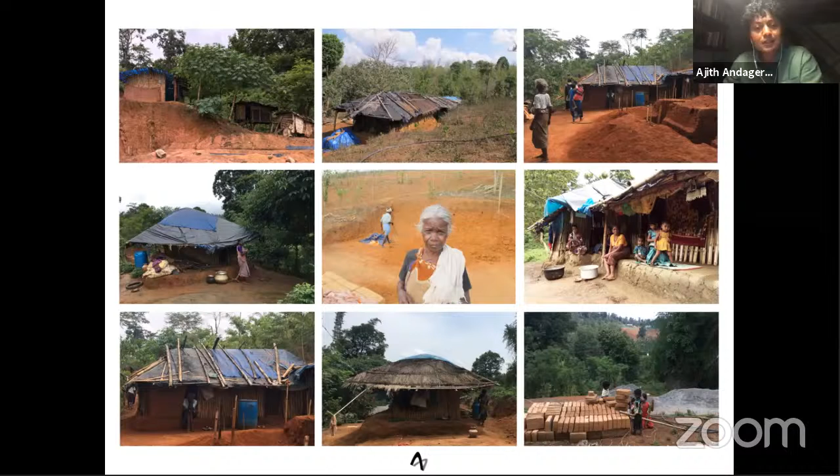So here the major portion of the structural members are made out of adobe walls, and the infill in between is made with wattle and daub using treated, woven bamboo, plastered with earth and lime mixed.

Next. And also for the foundation, because in monsoon, due to capillary action, the water comes up and the entire flooring gets wet with moisture. So in the foundation, we had to use a pond liner to arrest the moisture coming up into the building. These are the modern techniques and materials we introduced to them. Next.

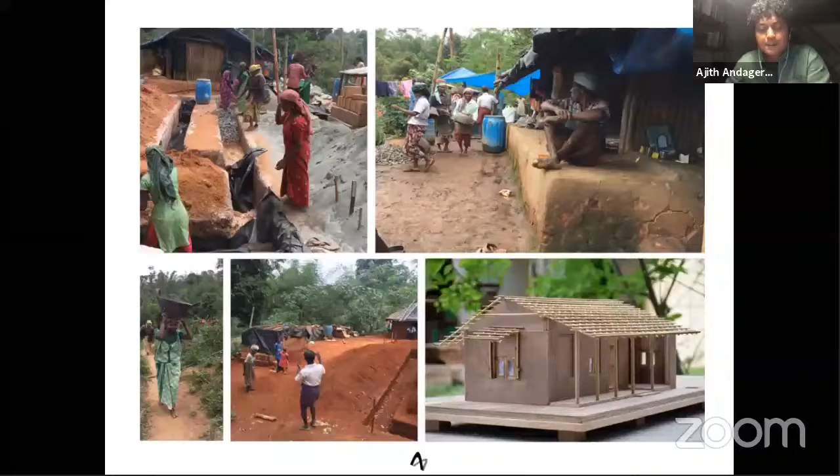These are some of the projects I showed. So next is, in our life we travel a lot in the villages, and all our projects are inspired by village houses. So it was a constant question in our mind, we need to do something beyond just taking pictures and using them as inspiration for our buildings or projects. How many people get an opportunity to travel and document?

So that's when we started a not-for-profit organization called Samrakshan India. As the word says, Samrakshan is conservation. So we started from Karnataka, documenting vernacular houses, common man houses. Karnataka has 30 districts, so our idea is, in each district, to document 20 houses from 300 square foot to 30,000 square foot, with various selection criteria.

And our idea is to share it with anybody who's interested. Open source, people can download our materials. This is to build awareness among designers and the general public, to showcase the value of these houses, what we can learn, how to go forward. So parallel with architecture, this is our research wing.

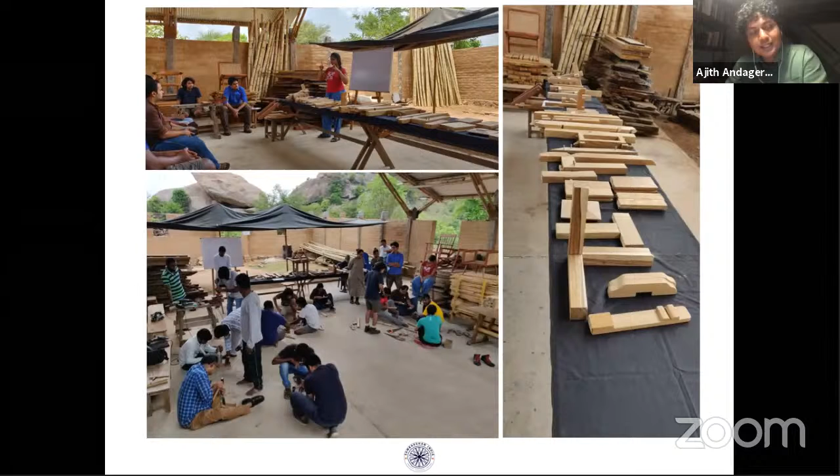With the documentation, we also conducted, and will conduct again this year, hands-on workshops for interested people, architecture students and architects to build awareness about these techniques. This workshop on basics of carpentry was quite successful. From the knowledge we gathered doing projects, we developed materials to share our knowledge on joineries and types of wood. This was again through Samrakshan India. Our idea is to conduct many more workshops in future to build awareness about material, technique, planning, how they used to design, and the designing process.

I think the sheets are missing, but anyway, this is one more initiative we started apart from the NGO. It's called Kaikale, meaning handcrafted. Previously for our projects we had to travel the country, go to China, Indonesia and other countries to buy furniture. We couldn't find one shop where we could buy all the furniture we liked, which took a lot of effort. So we decided, why don't we start our own workshop to make our own furniture for our projects, spreading by word of mouth.